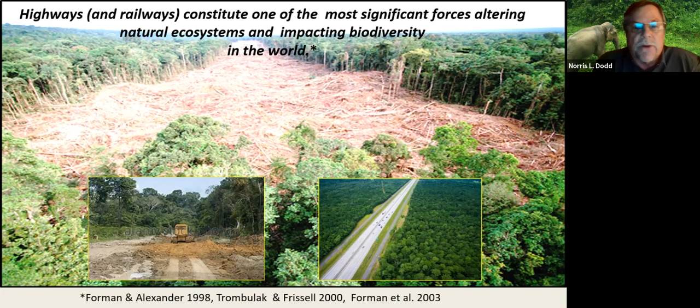Impacts can be direct and indirect in nature, including direct loss of habitats during construction. Trains and vehicles cause direct impact from collisions with all wildlife taxa, leading to declines in population viability. But the most pervasive impacts are indirect barrier effects that can totally preclude animals from crossing highways and railways. These barrier effects fragment habitats into smaller and smaller blocks, reducing landscape connectivity and isolating wildlife populations. This habitat fragmentation can lead to wildlife declines and genetic isolation.

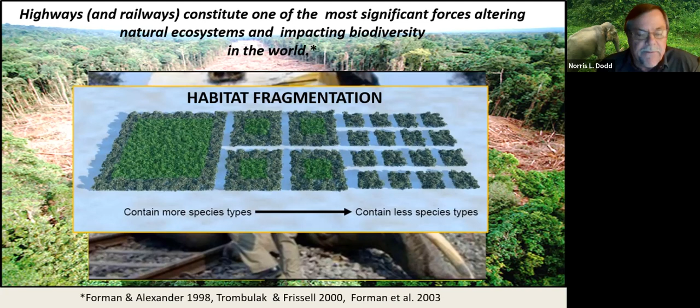The most severe impacts are realized in roadless and protected areas where new roads can be a gateway to biodiversity loss if they're not properly planned. Next slide, please.

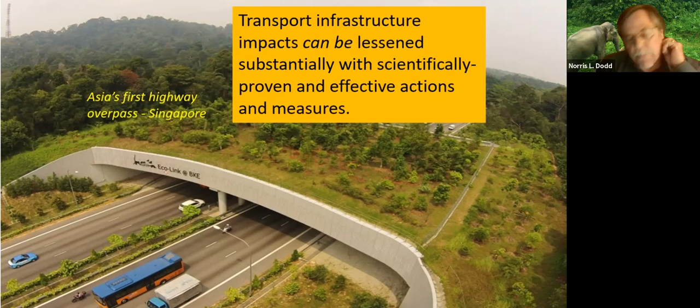Yet, transport infrastructure is essential to economic development across Asia. The good news is that transport infrastructure impacts can be lessened greatly with proven and effective actions and measures, especially when they are applied early or upstream in the transport project planning process. Next slide.

I will touch on these key upstream actions and measures that, when applied collectively, can result in projects that are sensitive to the environment and allow us to balance transport infrastructure with biodiversity conservation. Next slide.

Adherence to policies such as ADB's Safeguard Policy Statement and the International Finance Corporation's Performance Standard 6 serve as the foundation to sound project planning. These policies provide clear expectations for evaluating project risks and achieving environmental compliance. Next slide.

Biodiversity conservation and landscape corridor planning at the regional, national, and corridor-specific levels provide identification of important conservation areas for use in project planning. These plans help identify potential zones of conflict that can be proactively addressed through project development. Next slide.

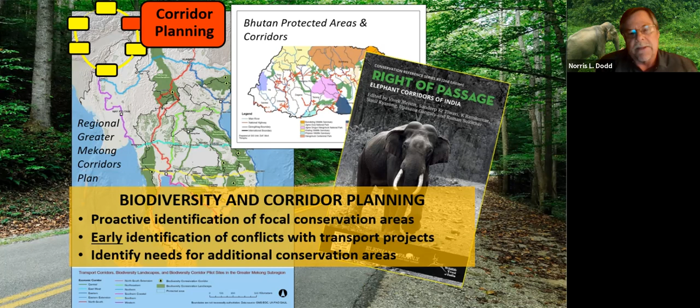Biodiversity baseline assessments are often required for projects in high biodiversity areas. The conduct of early and thorough studies can yield invaluable information that quantifies project impacts and then supports data-driven strategies to lessen these impacts. Transport project development is where the upstream actions are put into motion. Next slide.

The mitigation hierarchy is a long-established step-by-step process for addressing environmental impacts, and it is especially appropriate for projects in high biodiversity areas. The first and most important step should always focus on avoidance of impacts where possible, which is especially important for projects with critical habitats for endangered species, legally protected areas, as well as areas not suited to construction, such as steep slopes with high risk and unstable soils.

However, when full avoidance of impacts is not possible, green infrastructure can be effective in mitigating transport impacts.

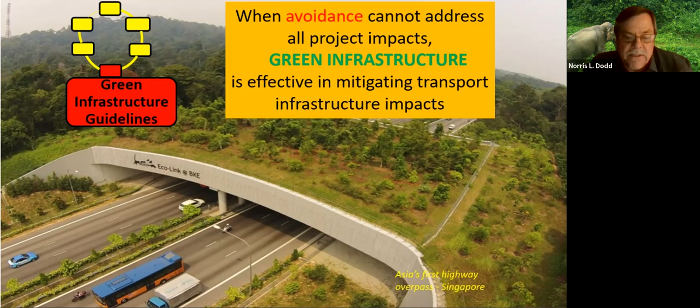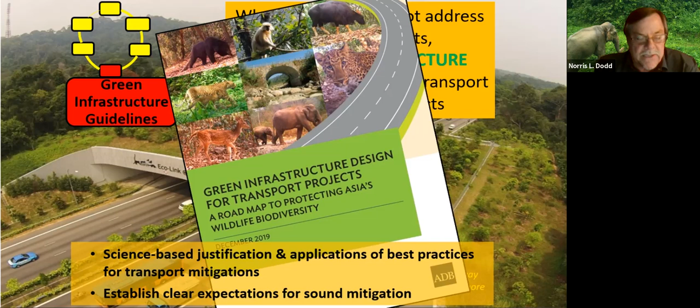ADB recognized the critical need for a set of guidelines specific to Asia well over 5 years ago, and the guidelines were just recently published after much hard work. These guidelines incorporate the best available science in a comprehensive set of best practices for transportation mitigation. They help consultants and transport agencies alike establish sound recommendations for mitigations.

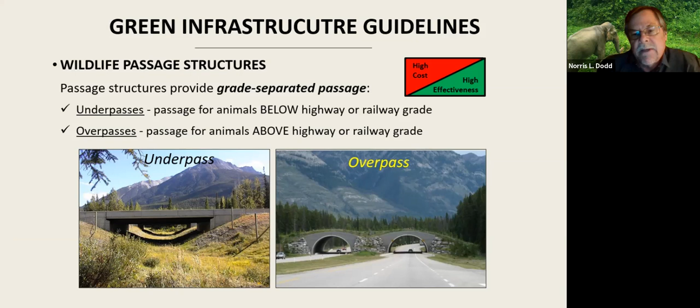Such as for wildlife passage structures, which are the most effective green infrastructure measure in preventing wildlife collisions and barrier effects. They're also the most expensive.

These passage structure guidelines provide recommendations for the full range of wildlife taxa, small to very large in size and mobility, with corresponding structure sizes and spacing distances. These guidelines establish clear and objective standards for meeting passage structure needs for a variety of target species.

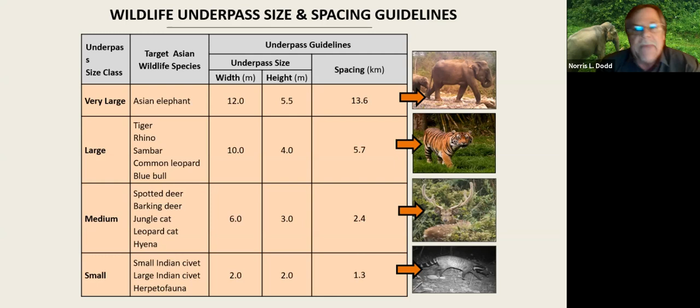Given the high cost of passage structures, the guidelines advocate for cost-effective integration with other infrastructure functions. Properly sized and designed drainage structures can serve as effective dual-use underpasses at modest additional cost.

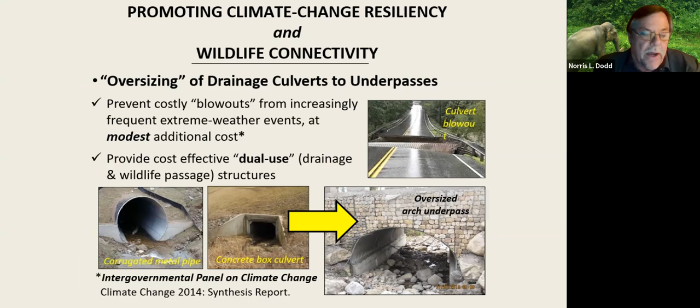Small drainage structures in Asia are subject to blowouts from increasingly frequent extreme weather events. Oversizing structures to better accommodate higher flows can prevent costly repairs and disruptions to commerce, while better incorporating wildlife passage via cost-effective dual-use structures. Also, cost-effective prefabricated designs are now increasingly available for transport projects, as well as retrofitting of existing infrastructure to address spot biodiversity conflicts outside of transport projects.

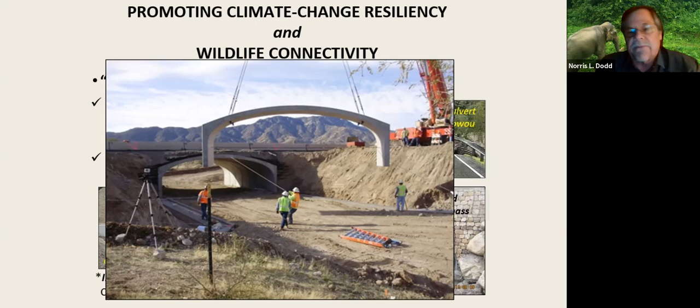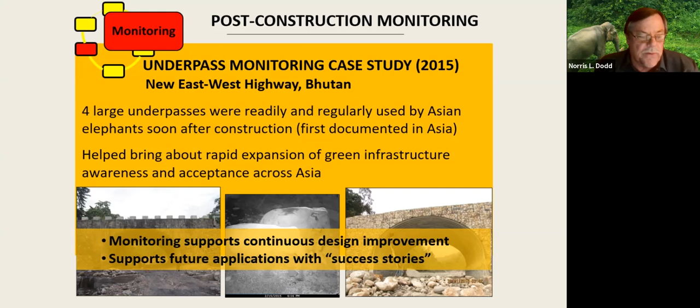While not necessarily being an upstream action, post-construction monitoring with dedicated funding is nonetheless very important. The information from camera monitoring of Bhutan's 4 large new underpasses found that elephants readily use them, which helped bring about a rapid expansion in awareness and acceptance of green infrastructure across Asia. Monitoring is essential to support continuous improvement of design guidelines, as well as sharing the success stories that promote further acceptance and future use of green infrastructure.

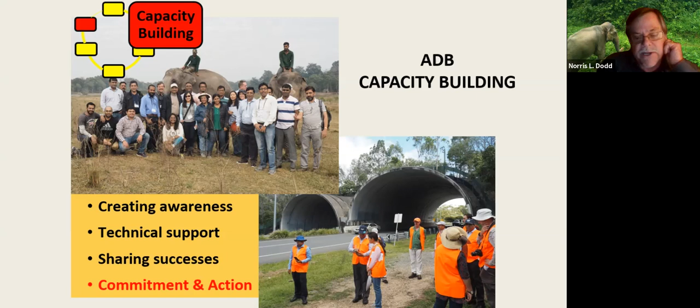And lastly, the effective application of the upstream actions are greatly enhanced with capacity building and technical support, which ADB has aggressively pursued the last 3 years and continues today to foster awareness and action for biodiversity conservation in transport projects.

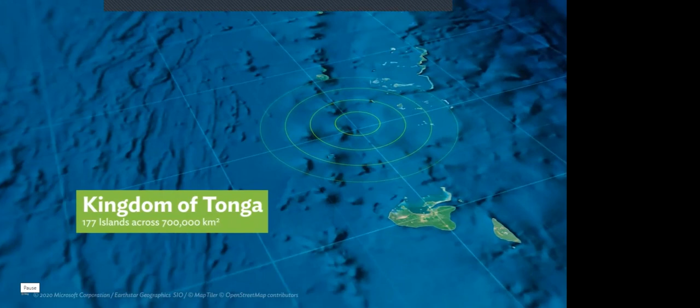The Kingdom of Tonga, situated in the southern Pacific Ocean, is an archipelago of 177 islands set across an expanse of 700,000 square kilometers of ocean. The population of 108,000 has a strong seafaring tradition, and current and future trade plans rely heavily on sea trade to develop the economy. Currently, the kingdom's economy is based on a large non-monetary sector, remittances from foreign-based nationals, fishing and agricultural exports. Tonga's development plans emphasize a growing private sector, upgrading agricultural productivity, developing tourism and improving communications and transport. Substantial progress has been made, but much work remains to be done.

The current port container terminal at Queen Salote International Wharf is the lifeline of the remote island country of Tonga and has been identified as a bottleneck to future development.

Queen Salote Wharf is the capital international port for Tonga. This is the only gateway for this island. We only have one international wharf. Currently, when the ships are arriving at the ports, the berthing is too short. We need a longer berth for the container ships coming to Tonga.

Knowing that there will be larger ships operating in the Pacific Islands in the future, the Queen Salote International Port needs to be improved and upgraded to be able to accommodate those ships in the future.

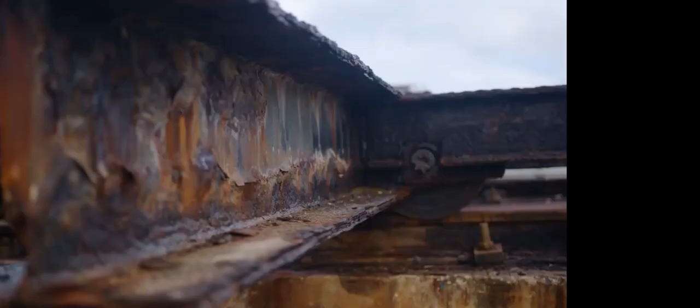With widespread degradation of the wharf facilities, a decaying concrete structure, insufficient lighting and substandard safety and hard stand provisions, the Asian Development Bank is working with the Government of Tonga for the provision of grant funding for the redesign and construction of an upgraded container port facility. Additionally, natural hazards such as cyclones, earthquakes and tsunamis pose a significant threat to the port container terminal and the achievement of national and regional development goals.

The target of this upgrade is not only to modernize the facility, but also to climate-proof the port in order to become an international gateway, promoting the economic development of Tonga.

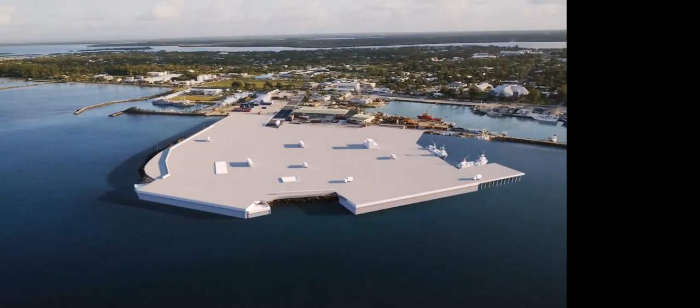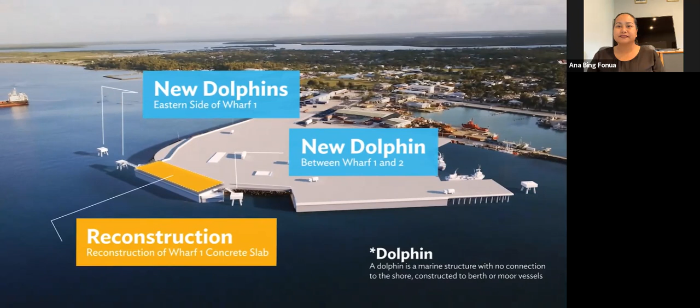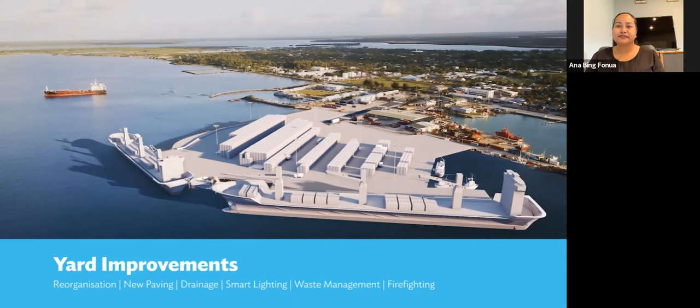The upgrade of the port is proposed to start construction in 2021, with activities expected to be ongoing for 2 to 4 years. The main features of the project include the extension of Wharf 2 to better accommodate larger vessels, construction of a new dolphin between Wharf 1 and 2, construction of new dolphins on the eastern side of Wharf 1, reconstruction of the Wharf 1 reinforced concrete slab, yard improvements, and smart and green port features such as reorganization, new paving, drainage, smart lighting, waste management and firefighting.

Capacity building programs related to port operations, safety, operation and maintenance, and gender equity policy and training for the Ports Authority. The hope for the Nuku'alofa International Wharf project is that it will improve provision of better facilities for trade, and increase the economic contribution from the transport sector, as well as provide sustainability of development here in Tonga.

After this project, if we get more ships coming and more transshipment containers, we will have more spaces for empty containers. Hopefully we will get more additional revenue for my country, stimulating the economy of my islands.

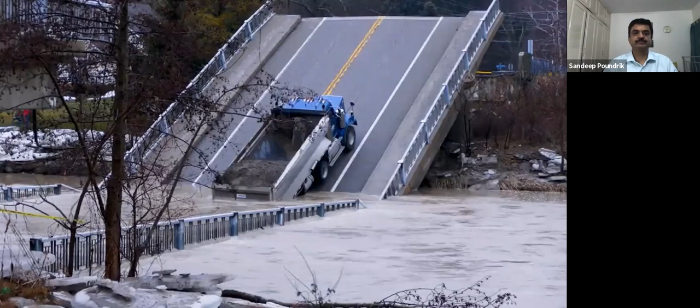Resilient infrastructure is critical for people's well-being, quality of life, and economic prospects, irrespective of where they live. Inadequate and poorly built infrastructure blocks economic and social development. Increasing exposure to earthquakes, floods, and tropical cyclones stresses infrastructure systems.

Two-thirds of total economic losses in disasters are associated with infrastructure damage. As extreme weather events become more frequent and intense due to climate change, these losses are set to rise. The impact on small island developing nations and least developed countries is particularly severe. Disaster and climate resilient infrastructure is essential to achieving the Sustainable Development Goals and accelerating climate action.

$94 trillion of global investment is needed to fill the infrastructure deficit by 2040. More infrastructure will be built in the next 20 years than in the last 200 years. Fortunately, achieving disaster and climate resilient infrastructure is not expensive. $1 invested in strengthened resilience generates $4 in avoided economic and social losses.

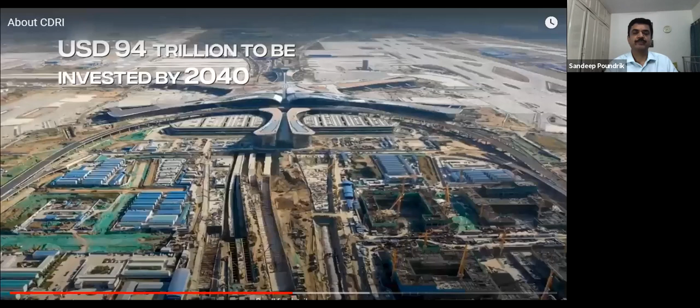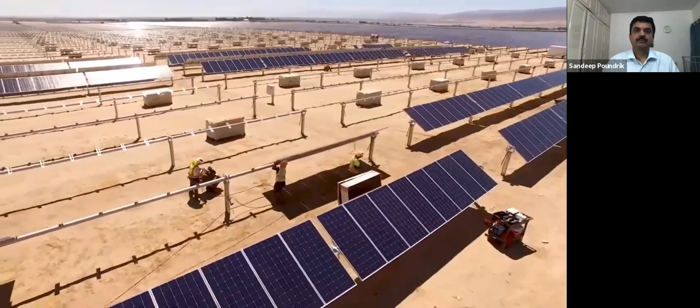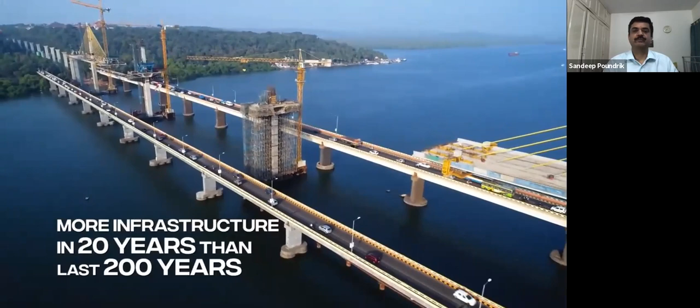Resilient infrastructure is critical for people's well-being, quality of life, and economic prospects. Inadequate infrastructure blocks development, while earthquakes, floods and cyclones stress infrastructure systems, causing two-thirds of disaster-related economic losses. As extreme weather intensifies due to climate change, these losses are set to rise, hitting small island and least developed nations hardest. Resilient infrastructure is essential to achieving the SDGs and accelerating climate action. $94 trillion in investment is needed by 2040, with more infrastructure built in the next 20 years than in the last 200. Fortunately, resilience is affordable: $1 invested generates $4 in avoided losses.

The Coalition for Disaster Resilient Infrastructure is an international partnership that will support countries to build the disaster and climate resilient infrastructure they need. Championed by global leaders, CDRI will provide knowledge, technical support, and capacity development to those countries with the greatest infrastructure challenges. Join us to achieve the SDGs and accelerate climate action by making all new infrastructure disaster and climate resilient.

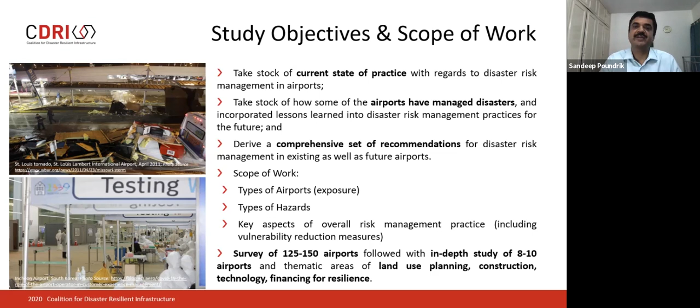So what is the new normal? This new term has come up now that we are going through a new normal. Some of the recommendations which we will be promoting is promotion of non-motorized transport, especially in urban areas, so that it's also climatically more sustainable. But in the present scenario, perhaps it will be a better option.

Then reviving the confidence of people in public transport by taking steps like sanitization, social distancing measures, active utilization of technology to reduce contact, cashless and contactless systems, contact tracing. Some countries are already doing it. So increasing the confidence and awareness in the public, implement management measures, advanced booking facilities especially for road transport so that people can plan their travel, and restructuring of agreements and finance systems because of COVID-19 or similar hazards.

The financiers or the investors may find it difficult to repay their loans in time, so how to restructure financing instruments is one of the issues which can be discussed. Coming to the COVID-19 situation, I think even till February or mid-March, none of us would have really believed that the world will come to such a scenario as what we are going through now. So what if something else happens in the future? The unforeseen risks which we have to be ready for, our transportation infrastructure has to be ready about. So that will also have to be seen.

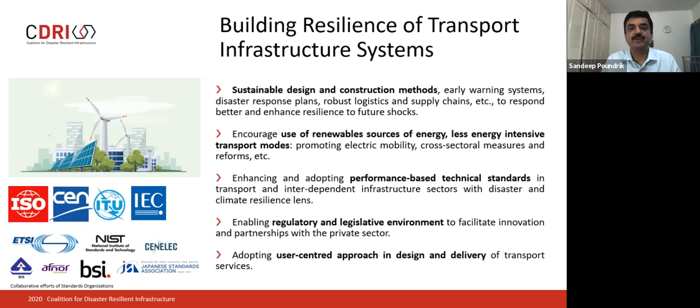With this, thank you, Preety. Thank you for giving CDRI a chance to put up its perspective.

Thank you so much, Sandeep, and thank you for highlighting what CDRI is planning, and also the importance of knowledge creation, dissemination, partnerships, and a global platform to take these initiatives forward, and some of the features in the new normal and future directions of CDRI on the upstream side. So thank you to all the panelists for some very wonderful insights on the subject.